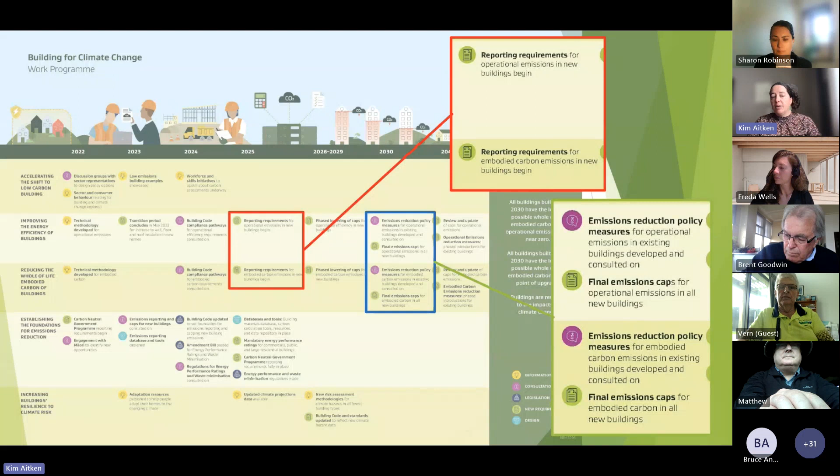This is the Building for Climate Change work program. It's available online. And I think what we're talking about today are the reporting requirements that begin in 2025 on both operational emissions in new buildings and the embodied carbon emissions for new buildings. This is quite a new one, certainly in a New Zealand context, the reporting of embodied carbon. And then we look at what are the final emission caps set for 2030. So although this is a 2030 work program, the measurement and understanding around what needs to happen actually begins at this point without any changes to this work plan in 2025.

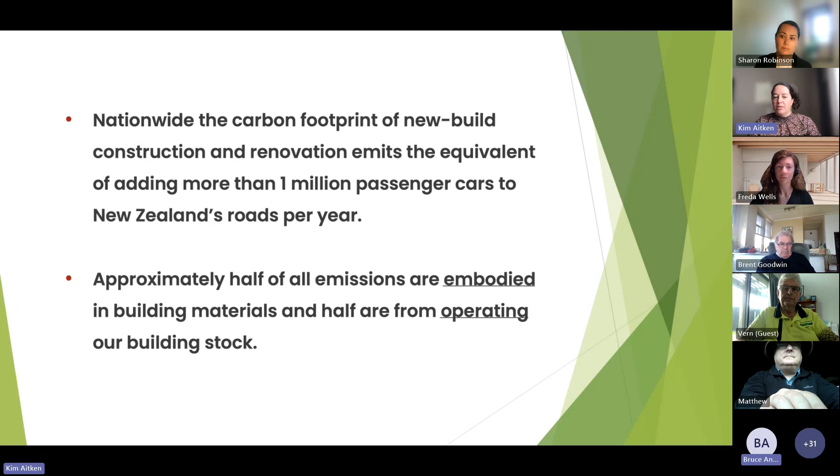So for a visual, this is really helpful. The carbon footprint of the new build, construction and renovation in New Zealand emits the equivalent of adding 1 million cars a year to New Zealand roads, split pretty much evenly between embodied carbon, which I'll touch on, and operating carbon of this new stock. So we've got a significant issue here in how we're building and what we're building.

And I will talk and introduce, without preaching to the converted, what the difference is between the embodied carbon emissions and operational carbon emissions. You'll see CO2e, carbon dioxide equivalent, which is how we measure greenhouse gases.

So when we look at embodied carbon as in context, we take what seems to be a simple unit, which is the humble fridge. And when we need to measure the embodied carbon of this unit, we have to look at every component part, what it was manufactured from, how it was manufactured, and the energy that went into manufacturing the individual components, the manufacture of the unit or the fridge itself, what components are scheduled to be replaced over the lifetime of that fridge.

So you include any items that have a lesser shelf life and will have to be replaced. And then we have to look at what happens at the end of life of that unit. It's seemingly quite complex, but what we're doing is we're being responsible for the choices we're making and the materials we're using.

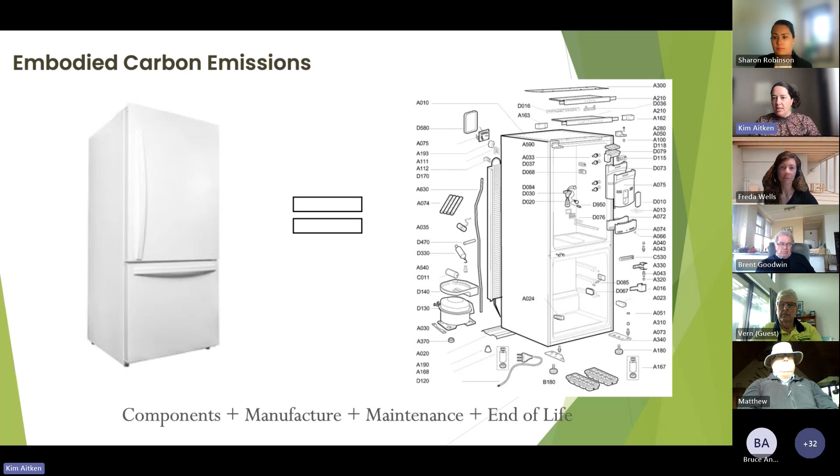In a construction standpoint, that translates to looking at the individual components chosen to be used in the manufacture of a house or construction of a house. Then the process itself, what is the process we're using to create that structure?

Same concepts, the maintenance over the lifetime of this house, replacing steel, replacing weatherboard, what items will need to be replaced and how many times they'll need to be replaced over the lifetime of that useful life of that building. And then the end of life, what elements of that construction will go to landfill, what will be recycled, what could be reused. And although we're early in looking at the technology around waste minimization, it's an important factor of what we're looking at.

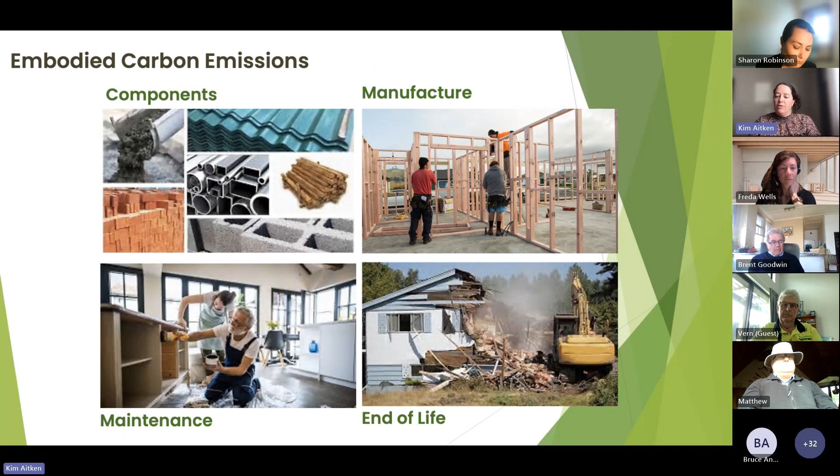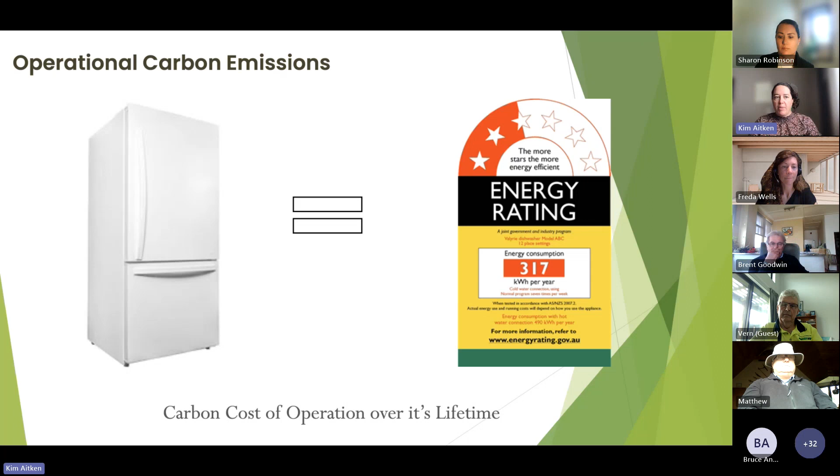More familiar, I think, to most people, operational carbon. If we look at that same fridge, what is the energy rating? How much energy is going to be consumed under normal operating conditions over the lifetime of that building? And that would be more measured in what we would know today around things like passive house. Minimal amount of energy is obviously better for the environment, but also for your pocket.

And when we look at that in a housing context, there's energy that's required for heating, separately the energy that's required for cooling, and then the energy of the systems within the home itself. So in this case, a hot water tank, things like your appliances, and then included in the Building for Climate Change program is water use, how much water is being used per liter per day per area of house itself.

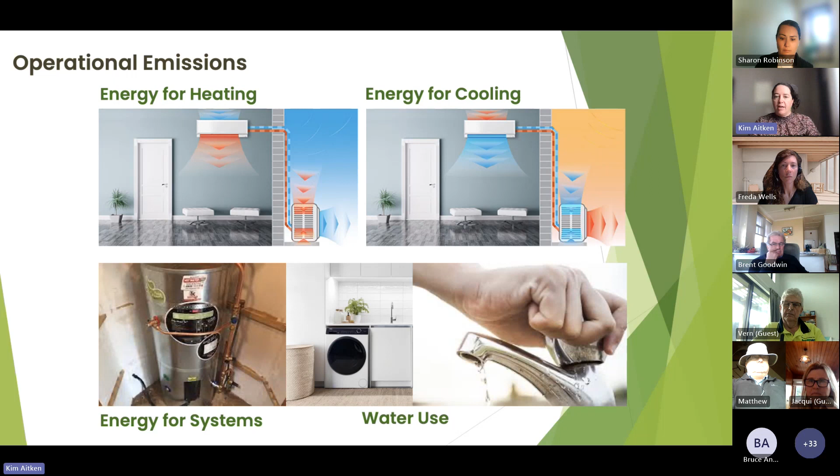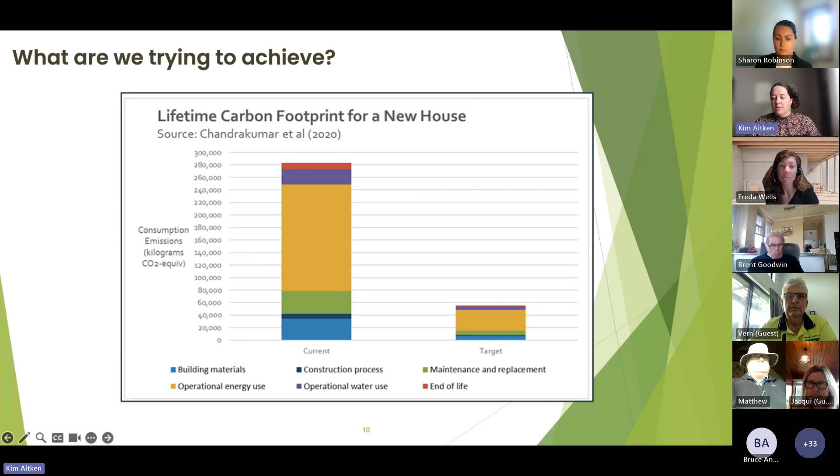This is my favorite graphic because it gives a really good visual representation of what we're trying to achieve. So this is the 2020 house, and this is a combination. This is the lifetime carbon footprint of a new home in 2020. You see in yellow here, this is the operational energy, how much energy is used in running the home, and then split out from end of life here in red, right down to the materials used at the initial phase. So this is what we have been doing, and our target is a significant and really profound reduction of that house and its footprint and what it's costing in terms of greenhouse gases.

So the future really looks like two considerations.

So you've got the choice of materials. Concrete and steel are the two biggest emitters in New Zealand, using about 50% overall of what's used. Then aluminium, plasterboard, masonry, and framing. Those are all elements that need to be thought about and their use case considered quite carefully.

And then looking at the performance of the finished building, things like insulation, which most people are familiar with, air tightness, which is how much does your building leak once you've heated or cooled your air, how much of that just leaks out through the building itself, joinery, and what systems and fixtures you're using that are low in energy but also considerate of things like water reduction.

So what is being planned at the moment is that the Building for Climate Change program requires compliance to be demonstrated. So you have to design to meet the target, but also measured or verified at the time of completion.

When I started my business in Canada in 2018, it was about 2 months before the first implementation of a series of the same step changes that are being proposed under the Building for Climate Change program. It's a massive transition from designing something to then verifying on site, which I know Sharon can touch on, that what you've designed has been constructed and actually achieves the targets that are necessary.

In that Building for Climate Change program, there are new measures proposed for building resilience, and this is more designing for climate in its extreme. Flooding, cyclones, everything we've experienced in the last 12 months, earthquakes—all of those are factors, wildcard factors that will need to be taken into consideration as the code goes forward.

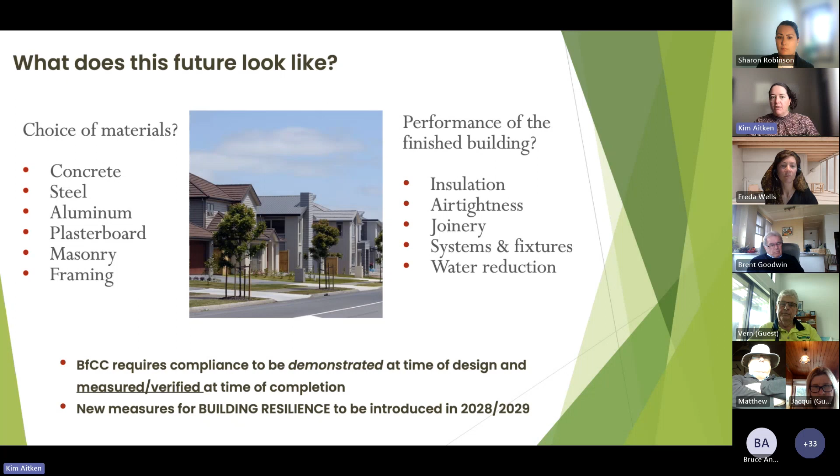Just helpfully, I like to picture things in numbers. At the moment when we look at what's being built in New Zealand and really understand the implications of the change, there's around 4 million square meters annually just in detached houses and low-rise residential construction that New Zealand produces. When we think of those 4 million square meters, every square meter has to be better. It has to be made of better materials, and it has to do better.

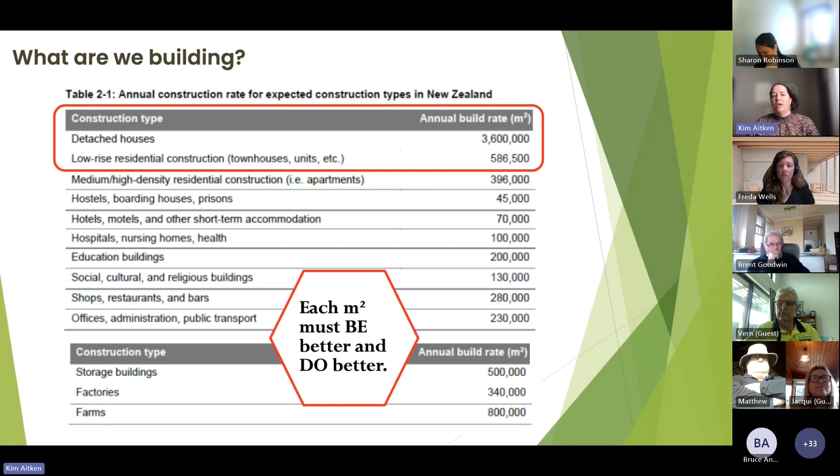So it's got to perform in a way that never really was required before here in New Zealand. Thankfully, lots of other countries have gone through this transition into high performance building. Some countries, such as Scotland and Ireland, similar size to New Zealand, picked the highest requirement and made it all happen in one go. Other countries, UK, North America, have picked step changes—every year something changes, and as you go, you gradually adapt to get to that higher target.

Thinking about that in an industry context—this is quite high level—there is generally a knowledge gap across the sector regarding the future code changes that will be required. It's not promoted, it's not talked about, there's not a lot of planning yet in place. We are a little bit early, but that's the point of what we're doing right now, is having these conversations.

Because from a project delivery perspective, continuously modifying your product or your process or your performance or your pathways to performance is highly disruptive. And I'm coming from an offsite manufacturing lens as well as an on-site construction approach. From the work that we've done within the Accord, there really are 2 distinct categories within industry at the moment, and our goal is to support those who are actively looking to be ready.

So, 2030 ready—what does that look like? We look at our fictional ABC building company: there's 2 pathways that have to be considered to be 2030 ready. There's the operational process compliance—is how I'm building going to get me there in terms of the performance of that end unit, regardless of what product is chosen to achieve that end target?

And then we look at the embodied carbon—is my system heavily reliant on steel, concrete, aluminium, items that we know are going to end up on the less-is-more list? But we're also aware that within this lower tier, product categories will naturally evolve between now and 2030. Things like your windows, the efficiency of your heating and cooling systems, the efficiencies of hot water tanks, laundry equipment, and low flow water systems—the market will step up as required to meet the demand.

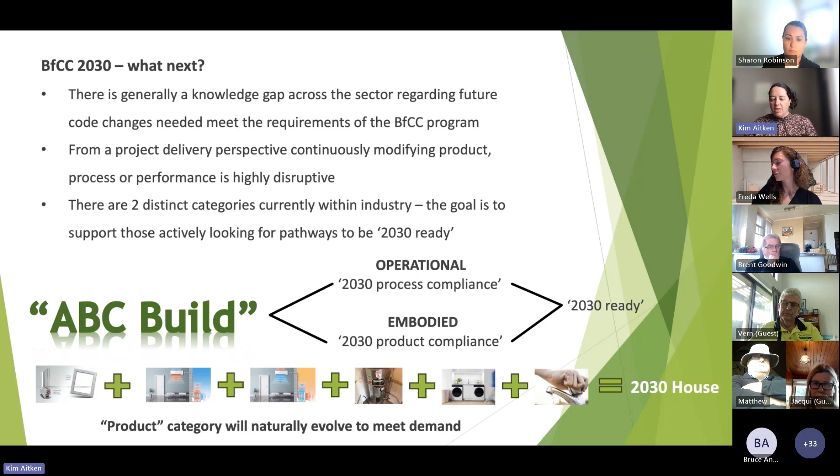So when we talk about being 2030 ready, we're not necessarily indicating that everybody has to step up today and create the 2030 house today. It's being aware of what's the responsibility of industry, what's the responsibility of government, and then what will the supply chain naturally adopt in order to really meet those requirements. So it's not as complex as it might appear on the outset.

So looking at the cost, the complexity, and the need for certainty, is there an opportunity? And this is a transition into the conversation around offsite manufacturing in New Zealand.

So this jump, from my perspective coming in from the outside, my specialty is the frame and truss sector and the utilization of that sector. And New Zealand already utilizes offsite manufacturing in 97% of homes constructed today. We just don't think about it that way. And that comes from the prefabricated roof truss, which has 97% residential market share, and then the use of pre-nail wall systems, which is 90% market share.

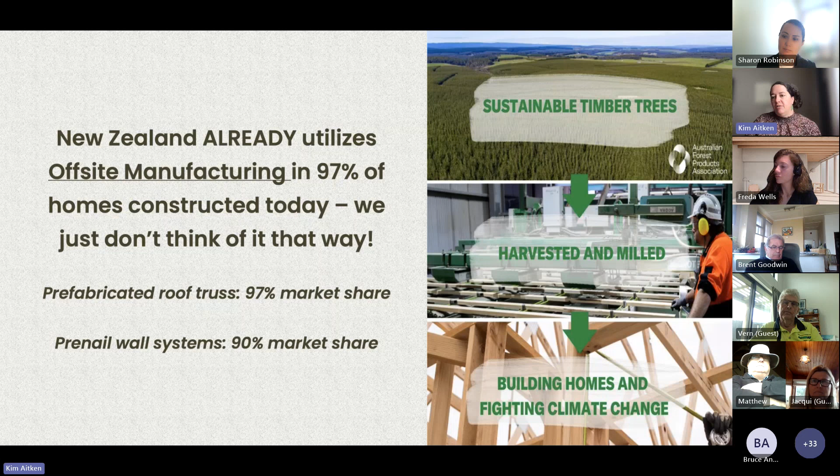So New Zealand is already, whether we are aware of it or not, way ahead of the curve in being familiar with the concept of producing a design, outsourcing that to a local plant that is doing it and has been doing it for a long time, and then utilizing those, in this case a pre-nail wall system on site, to really achieve what needs to be achieved in terms of putting a building together.

So the transition to high performance building will touch on the role of offsite manufacturing, OSM, and then there's the modern methods of construction, MMC. There's a lot of bandying back and forth between the two topics. There's prefabrication, there's a lot of umbrella terms.

And when we talk about modern methods of construction, we look at things that are not necessarily a manufacturing system or a product typology, but there are softwares, there are design tools, there's lifetime project management. There's a lot of ways to modernize within the construction sector.

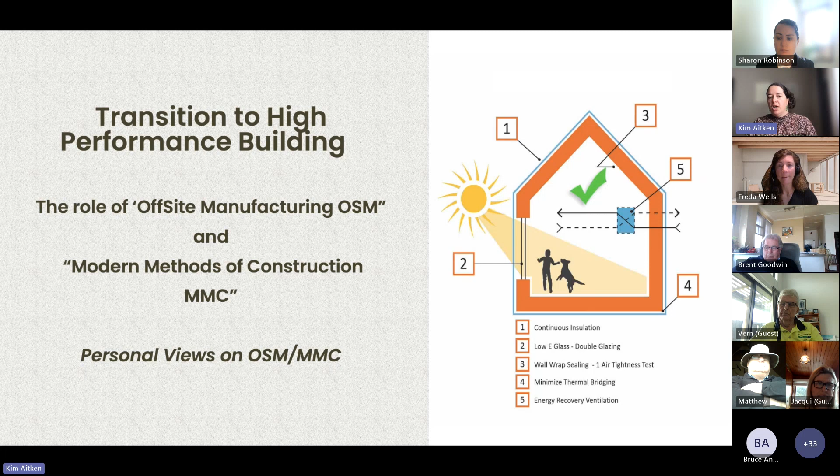And these are the views that I'll share, my own opinion on how New Zealand can use the OSM and the MMC to really smooth out what it looks like to build the new way.

If we were to really nut it down, high performance buildings is layers of complexity, and that's the days of a skilled craftsman on site creating structures with cut joints, and it was a craft that really transitioned to a qualified trade over the last 80 to 100 years. Trade schools, people going away serving their time, and now we're really at this transition to building science.

What is the science behind the design? How does individual components perform, and how do they perform when you combine them together? And the construction sector is probably one of the last to be brought into what might be looked at as the modern way of doing things. There's not a lot of industries that are left that are still doing it the old way. So I think the time is, we're not leading the charge by any stretch of the imagination.

A lot of words here, but there's the pros and cons of off-site construction and the pros and cons of on-site construction. I've just highlighted the ones that I think are important when we consider building for the future. I love flexibility, the flexibility that comes with on-site construction. There is a lot to be said for being able to adapt and modify and really go with the flow.

It is the current known way. So everything we look at going forward is this is the way it's always been done. What is the motivator or the lever for somebody to leave the old way and move into the new?

Cons of on-site construction: availability of skilled labor is one that at the moment we're on the brink, and give it another 5 to 7 years, especially with the knowledge transition that needs to come. That's going to become a major issue, and I've seen that in North America and back in the UK.

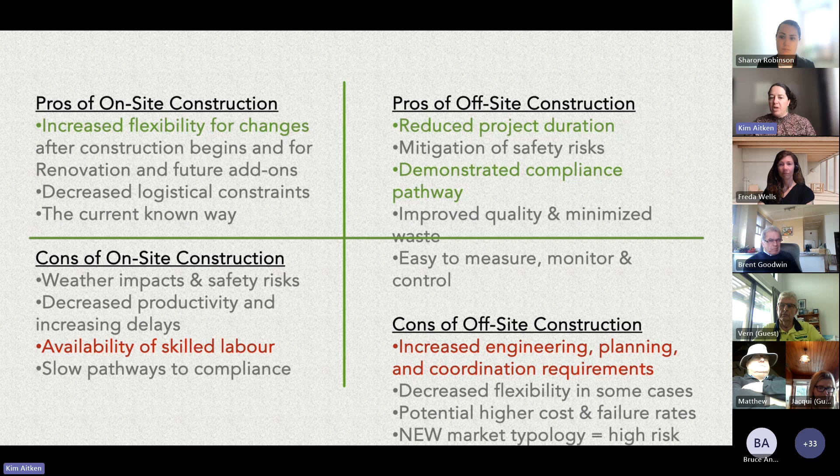So it's being cognizant that those upfront requirements really need to be thought about. So if I distill it all down to the opportunity I see with OSM or MMC, it's really putting the value in the right place.

It's not replacing tradespeople. It's not replacing local factories with monolithic, single source, big production boxes in factories where everybody gets a box and you take it or leave it. It's really understanding the value depending on what your project parameters are, whether it's cost, speed, complexity, simplicity, or just volume. It's understanding where the value can be found in that offsite spectrum.

As a structural engineer, the compliance piece is a major element for me, where I see the opportunity with OSM and MMC being critical, because as complexity increases, so do mistakes and problems and areas that don't become apparent right off the bat.

I know in Australia they've got issues like they've had in New Zealand with cladding. In North America, there was a lot of water issues, especially with offsite product, where you can't go in and modify it. You don't know what's behind the walls theoretically, but easier compliance and having a process that's been approved, and that process is repeated over and over in the factory, helps.

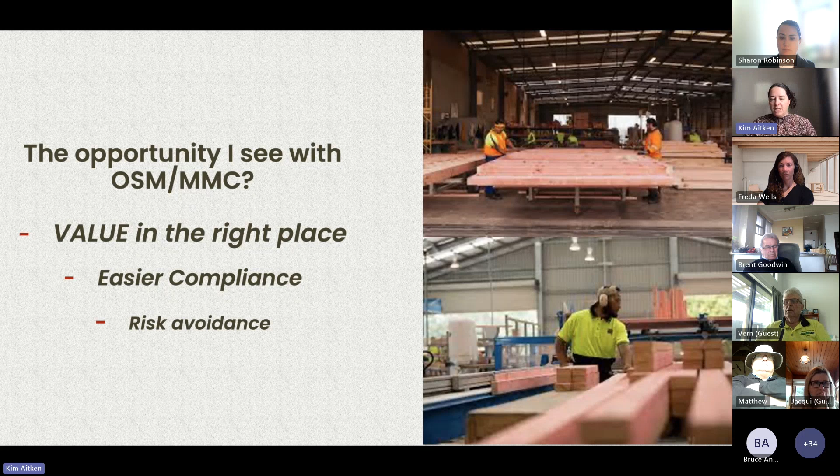And risk avoidance is probably the third one, where we don't want to turn around in 5, 7, 10 years' time and realize we made fundamental mistakes transitioning from the old way to the new way. I've seen that with specific types of insulation on the outside of a frame not installed correctly. In North America, we didn't have a couple of decades to understand the water was getting in - it was within 3 to 5 years because of the ice factor. So avoiding risk because a process has been tested and proven is highly important.

And that, I will now hand over to Sharon to give her views.

Thank you, Kim. So Einstein said the height of insanity is doing the same thing over and over again, and I think Kim's touched on this. We're in a changing environment. We need to change what we're doing.

As Freda explained, my background is architecture. I was doing architecture, drawing house plans at 7. So this is my passion. This is where I want to make a difference.

So I'm just going to touch on, there's lots of changes, expanding a little sideways on what Kim was talking about. We are seeing changes in the medium density residential standards, which are coming into effect in some places. We've got changes with energy efficiency, water efficiency, waste minimization, and of course operational and embodied carbon. I'll touch on those throughout the presentation.

I've got a slide that touches on the tools and resources available at the moment. I'll give you a crash course in passive house principles, touch on a couple of myths with our New Zealand building code that people tend to get stuck on, and then why we should be embracing this change, plus some opportunities and challenges with the medium density, the offsite, and the energy efficiency and waste minimization space. So that's me, as Freda said, in all those spaces.

Jane Goodall's my hero, and we are the most intelligent creature to walk the earth, and we are destroying our home. So Kim touched on this with Building for Climate Change.

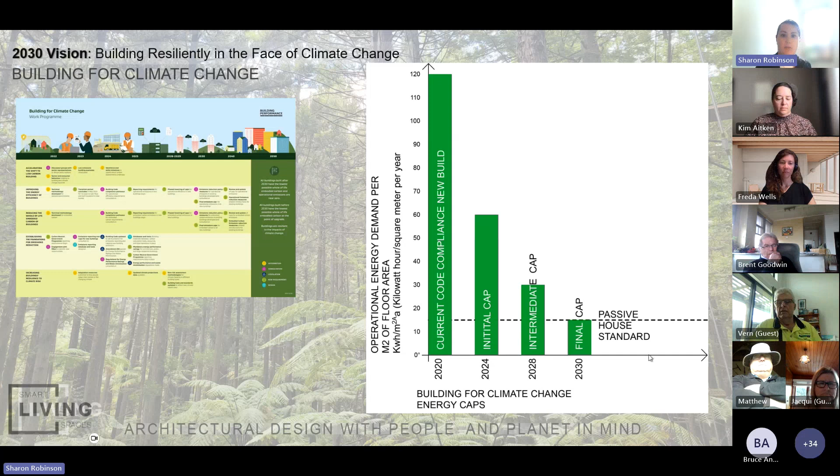I can speak to this as a passive house designer. Basically, by 2030, we're looking at that passive house standard. Passive house has been around since 1992. Ironically, we only introduced insulation as mandatory in New Zealand in 1978 - 14 years later, in Europe, they were developing houses that we're aiming for in 2030. So it's an international standard, an international organisation with over 30 years experience. It's possible, and there's a track record we can key into, with learnings there.

Kim did touch on this with timeframes and process. It's this part, the design and engineering part, where there are amazing opportunities between passive house, energy efficiency, or Homestar, because that's the side where we need intense focus on design. So if there's collaboration with everyone around the table, we can really get everything nutted down and actually deliver a faster project that's a high performing project.

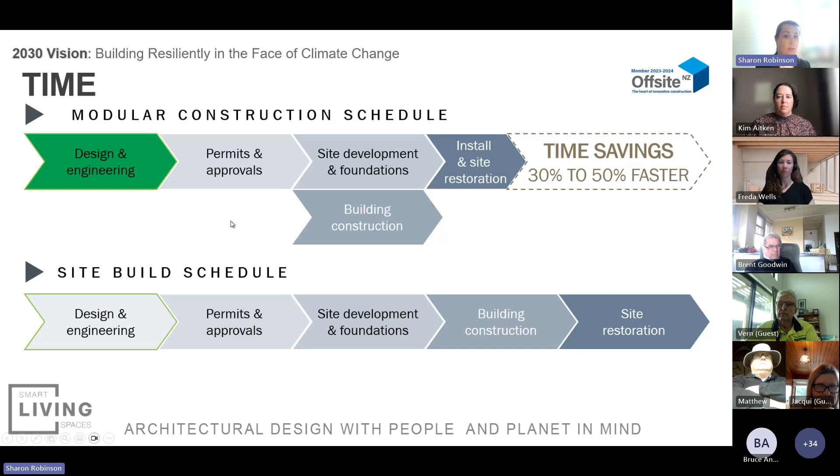We have Passive House Institute, and New Zealand has its own Passive House Institute. BRANZ is doing a lot of work in this space. They have design modelling with ALF. We've got MBIE in that space too, obviously with legislation.

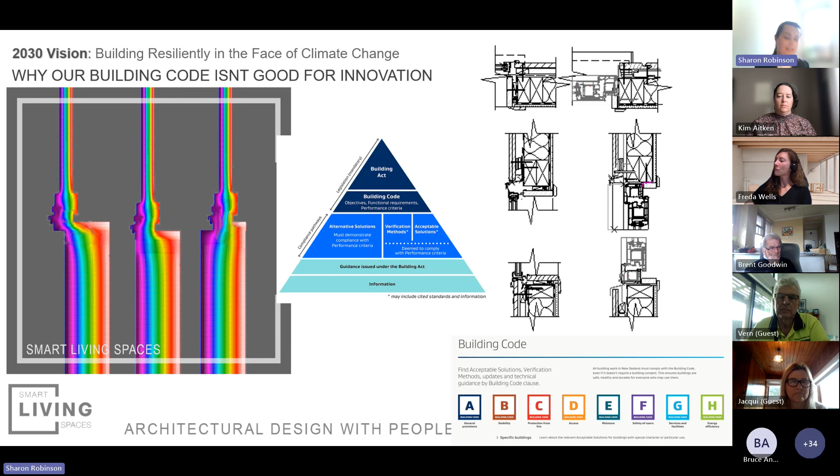I do want to say that H1 is energy efficiency, not insulation. So we've got a bit stuck on that in recent conversations.

The second myth to bust is the performance of natural ventilation — this concept of opening up your windows and just magically having air changes. We need 0.35 air changes per hour to remove all of that stale air out of our homes. Simply opening up our doors and windows isn't allowing that to happen, because that relies on the wind blowing from a certain direction at a certain speed, creating the necessary pressures.

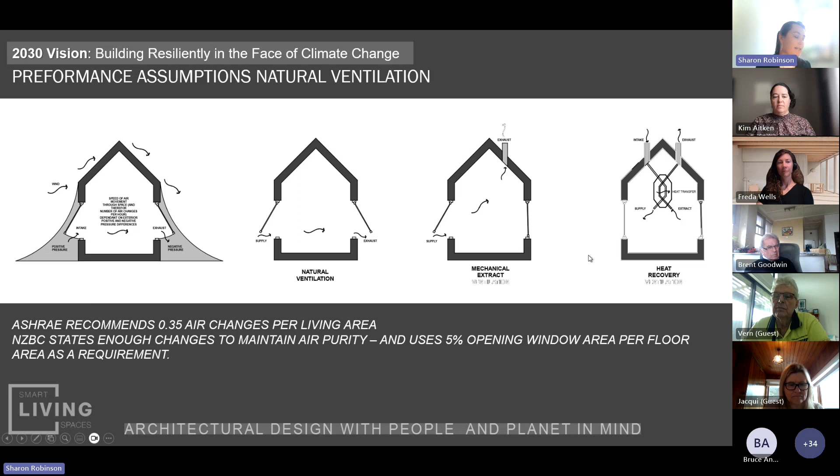So we need to start moving past mechanical ventilation and start looking at heat recovery ventilation if we're to embrace energy efficiency. I'm touching on passive house because I know it, but it is a building that's designed to optimize the health and well-being of those inside it while consuming very little energy.

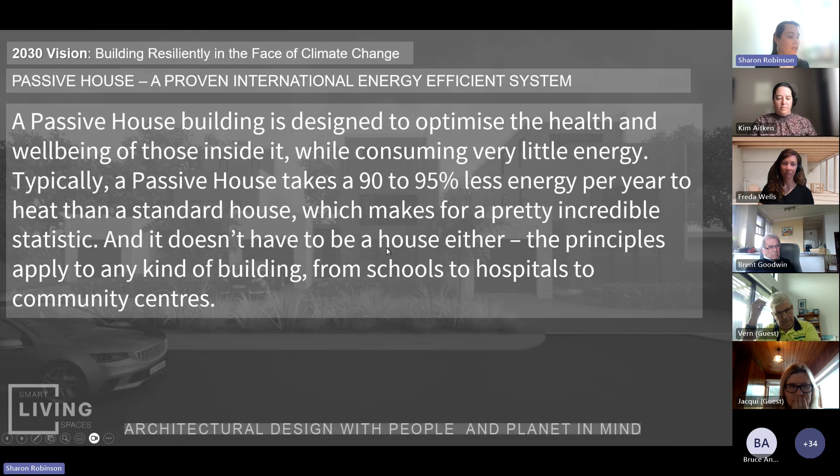Typically a passive house takes 90 to 95% less energy per year to heat than a standard house. I'd also say to cool as well — we underestimate what we need to cool. We tend to think about New Zealand houses just needing to be heated. And it's not just for houses — haus in German means building.

Better quality windows. We use aluminium in our windows — it's really good for cooking your food on a stove, and somehow when we put it into the windows, we think it's going to operate differently. Metal is a very good conductor of heat, so we should be looking at UPVC and timber as alternatives.

Air tightness — we generally don't consider air tightness in our buildings, yet it's still a factor. Air tightness means you stop moisture from tracking through your thermal envelope, so we're stopping interstitial condensation. We've had lots of people say, I've put double glazing in my house, I no longer have weepy windows. But if you haven't got an airtight house, that moisture is going somewhere and it's condensing somewhere in your thermal envelope. So we are going to see a new leaky building crisis, and that's going to be from the inside out.

So we need to address air tightness, and our new construction is getting more and more airtight — this won't be an issue in our old stock, this is not an old stock issue. Obviously, efficient thermal insulation, continuous thermal insulation, and then lastly, heat recovery ventilation.

It just makes sense to recycle the heat that you've already invested in. So basically, Passive House is a thermal modelling system that allows us to evaluate our energy use, taking into account the losses through the thermal envelope and ventilation.

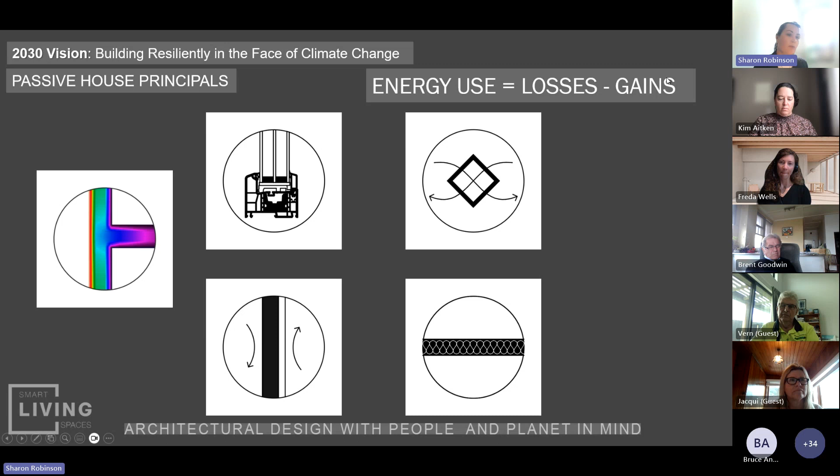Obviously, when you ventilate a space, you can lose heat or you can gain heat. Then there are the gains you get through proper orientation of your windows, and internal gains from cooking and appliances. Touching on overheating, because I think this is going to become a bigger issue.

Down here is the Auckland average temperatures, and here I've marked out the solstices and the equinoxes. There's been a myth that you design for the summer and winter solstice, but that's just 2 days of the year. If you notice here, the solar angles in Auckland for the equinox in both spring and autumn have the same sun's angle, yet the temperature in the autumn equinox is actually higher than in spring. So we need to shade more in autumn and allow more sun in spring.

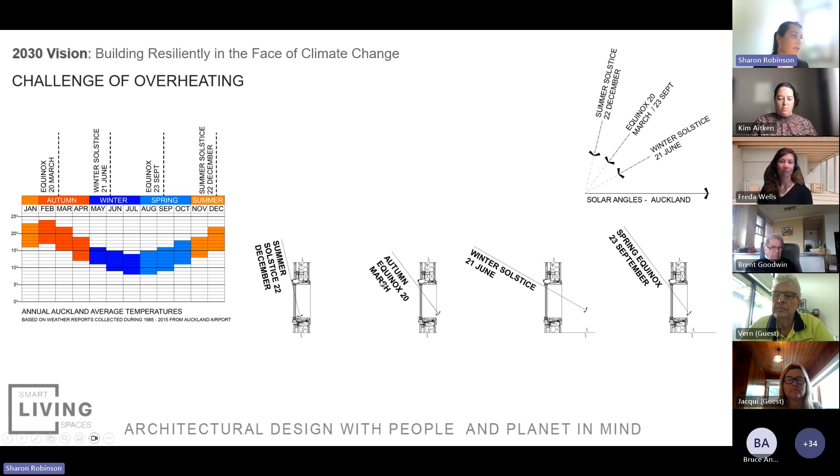So we need to start to consider shading in our buildings, and external shading, so that we can stop the heat from even meeting our internal environment.

So why should we do this? As Kim mentioned, hot water and space heating are our two biggest uses of energy in our buildings. Here's a scenario: a 200 square metre house that we are heating and cooling to 20 degrees year round, assuming a power price of 32 cents per kilowatt, which is obviously going to go up in the next 5 years. For a code-compliant house at the moment, it's looking at 120 kilowatt hours per square metre to heat and cool it to that 20 degrees. That means when you do the calculations, the power bill is $7,680 a year.

We don't pay that, because we compromise the health and comfort of our home to be able to afford to live in it. But if you were to take a code-compliant house today and get it to passive house performance standards with the amount of energy pumped into it, so we're comparing apples with apples, your power bill would be $640 a month versus $80 a month.

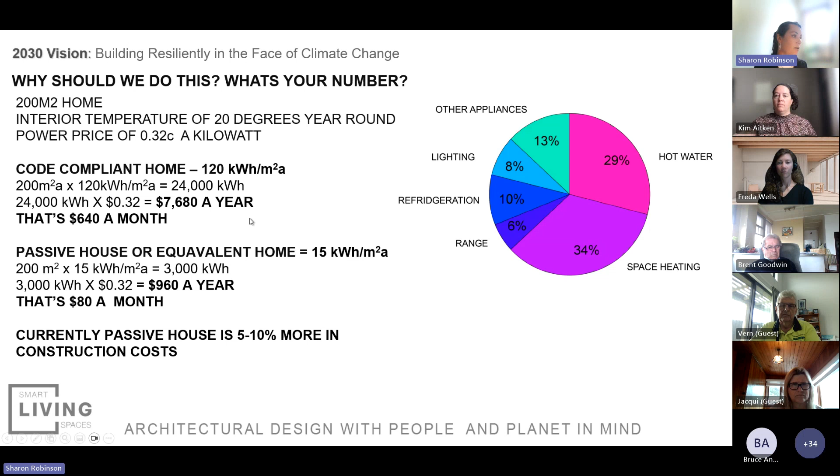Currently a passive house is 5 to 10% more in construction costs, but that's right now. If we consider this over a period of 10 years with rising energy costs, what's the true cost of it? We need to stop looking at construction costs in square metre rates, stop looking at construction costs as initial costs, and start looking at the lifespan of the 50 years that the building code asks us to do as a minimum.

Another reason why we should do this: I heard last week that 30,000 New Zealand children are admitted into hospital with asthma-related symptoms, not diagnosed, admitted to hospital. This lady, Catherine Letner, is part of Asthma New Zealand, she is the chief executive. She has got into the construction space because she has seen the result of us building the worst performing buildings that we can legally build. So we have one of the highest asthma rates in the world, which isn't really a statistic we want to be proud of.

And this is based on moisture and mold, not just insulation.

The opportunities with the medium density space and offsite construction - there is some resistance to it, but I'm a glass half full kind of girl. The attached housing typology that medium density is going to offer us allows us to have a new social typology, which people will resist, but there are energy efficiencies with joining spaces together.

This isn't a great example of it, but if you join two conditioned spaces together that are both heated and cooled to 20 degrees Celsius, you reduce the amount of energy lost on that shared wall. The challenge with medium density, again, is the sense of privacy, so we need to make sure we get that right at the design stage. But there's a real opportunity for social connection - we do live quite disconnected lives, and I think lockdown and COVID showed us how vulnerable we are with that.

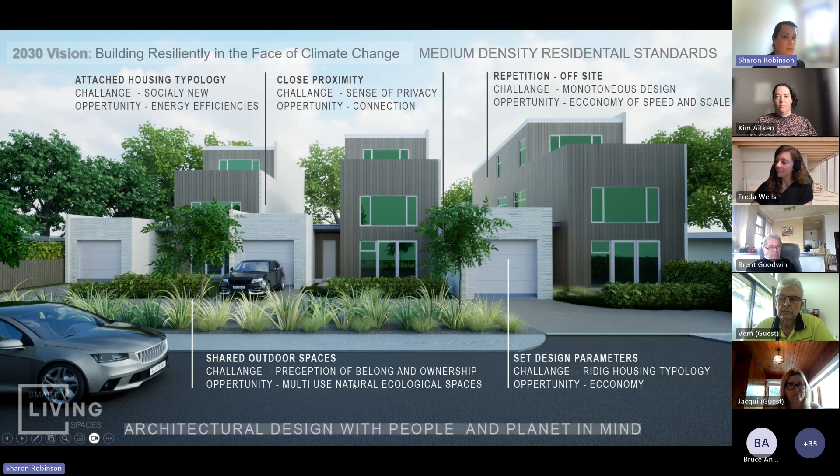The time on site, touching on that design stage, and Kim touched on this too, about getting it right. If it's not considered in the design space, it's quickly going to become a problem on site, and that's going to be very difficult to rectify.

But a lovely opportunity with offsite is that we've got less travel time for your tradies, less weather delays on site. With intertenancy walls joining buildings together, we have the challenge of creating spaces with good natural lighting.

But we also have the opportunity of good thermal efficiencies. With offsite assembly, the challenge is the lack of understanding at the moment. We all need to empower ourselves with knowing not just what we do, but how we fit into the whole process.

But the opportunity is better collaboration and innovation with parties, all sitting around that table at the design stage. Offsite offers this amazing opportunity of reduced working at height. We lose a lot of people on building sites - they're quite dangerous spaces. So the challenge here will be the planning and coordination so that you can reduce that working at height, but the opportunity is safer working environments.

And lastly, with waste, there's the challenge of accounting systems. I hear of tradies constantly leaving their waste and not caring because they're on site - no one else is there to see them do it, and it's not my problem, I'm not paid to do it. So with the offsite space, there's that opportunity for more efficient use of offcuts and better accountability of leaving a cleaner site for the next person to move into.

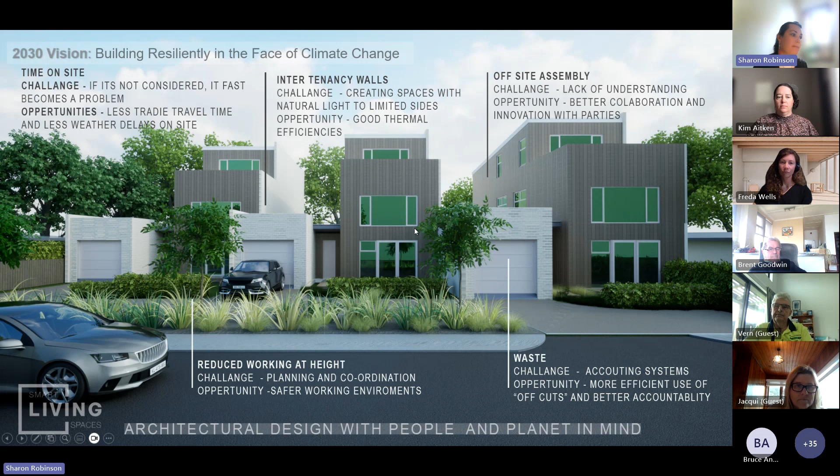Just lastly, and it's been a bit of a crash course, so I do apologise, but this is another saying that I keep close to my heart: plant a tree under whose shade you will never sit. We've been asked to stop competing against each other and realise we're on the same team to create a better environment. The construction industry has so much argy-bargy through it.

The bloody architect, the damn builder, and we need to all get around the table and realise we're all on the same team. Our client's not the developer, it's not the council, it's not the builder, it's the future occupants of the spaces we are creating, and undoubtedly the people we will never meet. Just as Catherine Lettner will tell you, it's the children who get diagnosed and get hospitalised every year with asthma. So that's my crash course.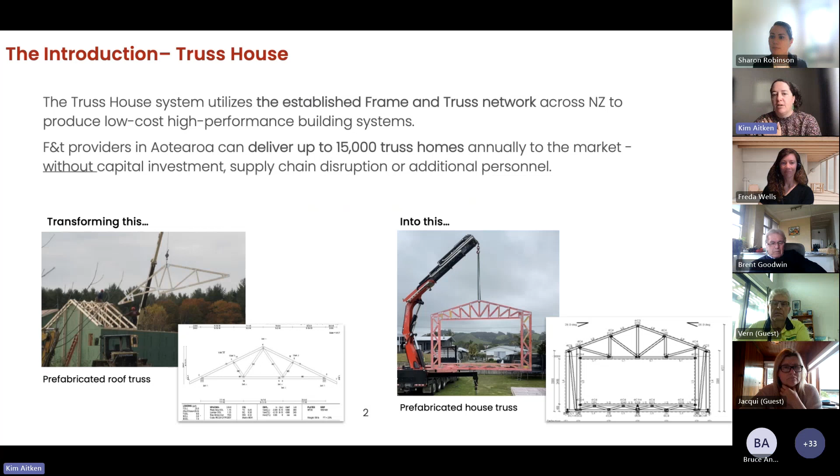We've built 18 different typologies of housing. At Truss House, basically, we use the established frame and truss network across New Zealand to produce low-cost, high-performance building systems, turning the traditional 97% market share truss roof system into an entire frame system to allow up to 15,000 truss houses a year to become integrated into the New Zealand market without investment in infrastructure, factories, any supply chain disruption, or the requirement for any additional personnel.

And this is my personal project passion, which is high performance housing for everybody at the very minimum - really good boxes. Truss House is just a method of framing. We have an architect sketch - this is just an example. Choose a frame typology: there's unlimited shape, size, orientation, pitch, slope, and use case.

These Truss House frames get assembled on site, as this one here was, all frames or a combination of frames and pre-nail walls. And then what you inherently have is this high performance building envelope with wider walls, reduced thermal bridging, highly engineered and rigid in all the right places when we think about future resiliency.

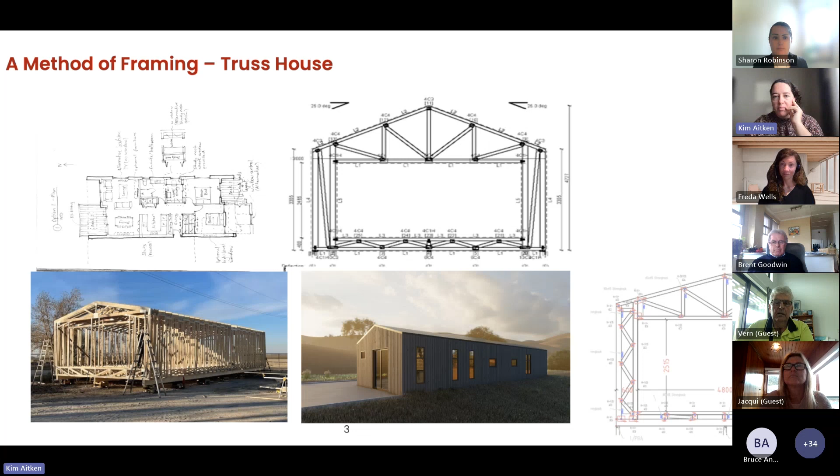The one we've built in New Zealand went through a tornado earlier this year and came out pretty much unscathed. We do not build, we are not the builder. We have a system that is available for all the builders, you know, all the government organizations. The client is whom the client chooses to be.

We've got 4 different typologies that we offer here in New Zealand: single-story houses with a suspended floor, single-story houses on a concrete slab, and then we've got 2-story and 3-story systems. We have just developed the 3-story system in the last couple of months.

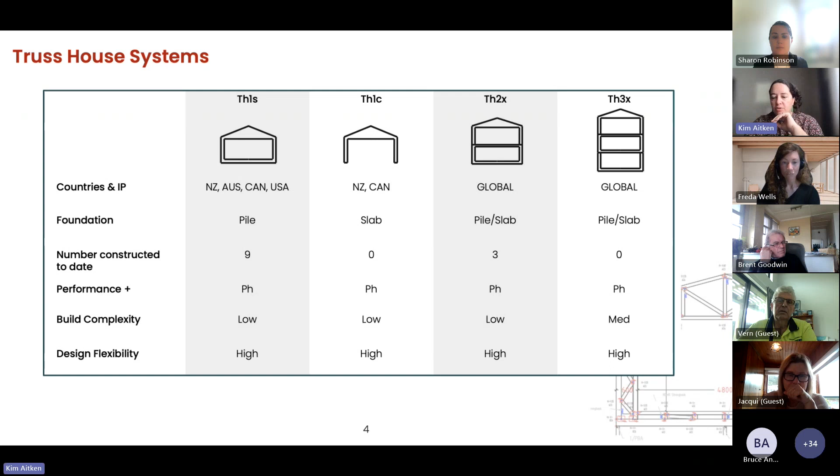We do this in a very simple way. We charge a license fee for every system that is sold, approximately 10% of the overall cost at frame and truss end of the housing system it represents. And we are covered under 3 sets of patent intellectual property for the system typologies that we've mentioned.

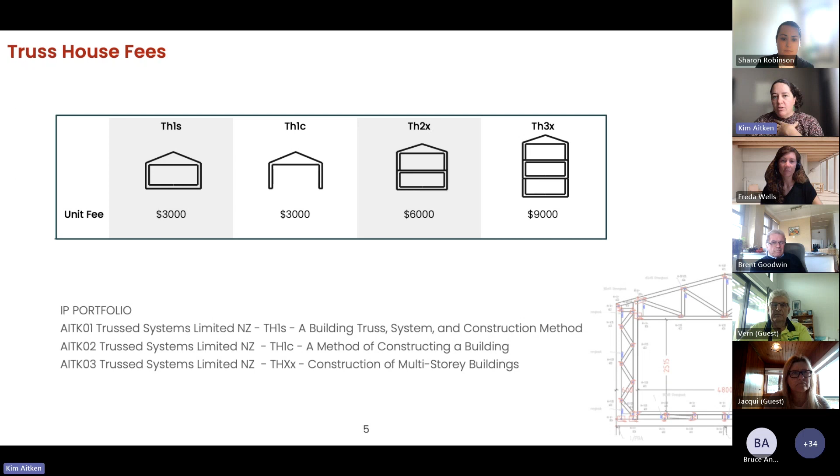So that model that we've adopted, we were the builder in Canada, and we realized the limitation as an organization of being the builder comes back to where does the value sit? Our value sits in what the system typology is, how it gets used, and what it means for a company or an organization to have access to this locally available system. And also, from our perspective, it allows 99% of the project revenue to stay within the community.

Alexander Construction is our project partner for the Hawke's Bay region, and what we're developing is targeted really at the shortage in that region of houses prior to the cyclone. And now going forward, there is an ever increasing need to build better than what was there originally.

Alexander as an organization have been around since 1947, and they have a very strong mandate around producing quality buildings. That's the first thing on their list. They are hyper focused on cost management and defending a client's budget. They have a high business ethic with all parties in the industry, which is beautifully written. They're energetic and motivated in the marketplace, and they're committed to sustainable green building procedures.

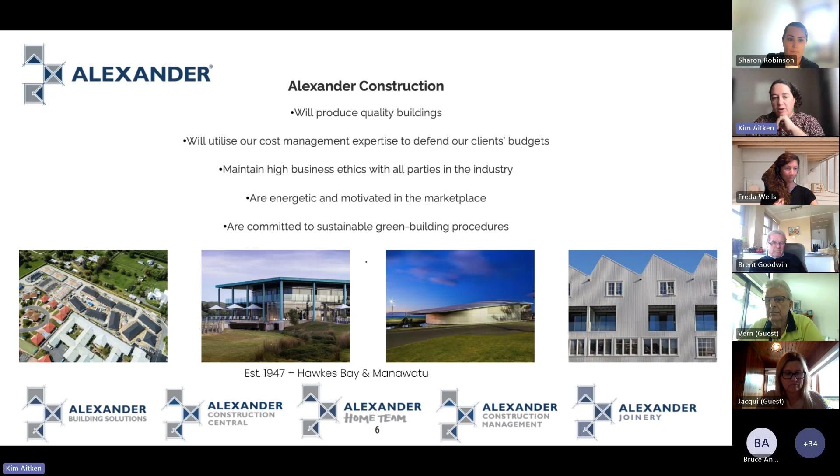They're across Hawke's Bay and Manawatu. They would be an example of an organization who have stepped up to be 2030 ready. A couple of their projects: Retirement Village, Castle Hill Winery, the aquarium in Napier. From Alexander's perspective, moving forward towards 2030, they were looking for a typology that would allow collaboration with their existing network, but also being future ready to adapt to what was coming.

So this collaborative approach: Alexander are the lead, partnered with ourselves, Truss House, their local architects Studio 26, Tumu Frame and Truss, and EB Consulting Engineers. This project is a 3-bedroom home compliant with the Kāinga Ora M255 design regulations for use of space for government housing. They deliver for Kāinga Ora as well as market.

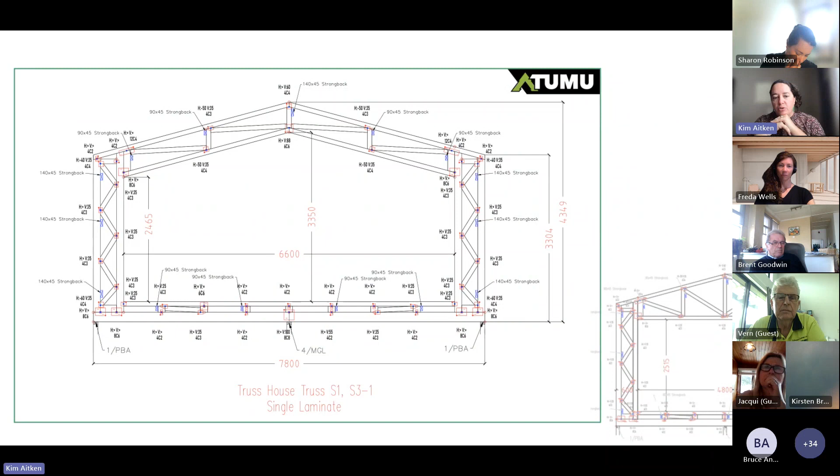This particular structure is designed using the Truss House system. Tumu ITM created a frame system for Alexander to be able to use to build this housing typology in a number of days. Start to finish, construction time would be 3 months off-site to deliver on-site. And very simply, Tumu has also come up with a layout on how these trusses get assembled on site.

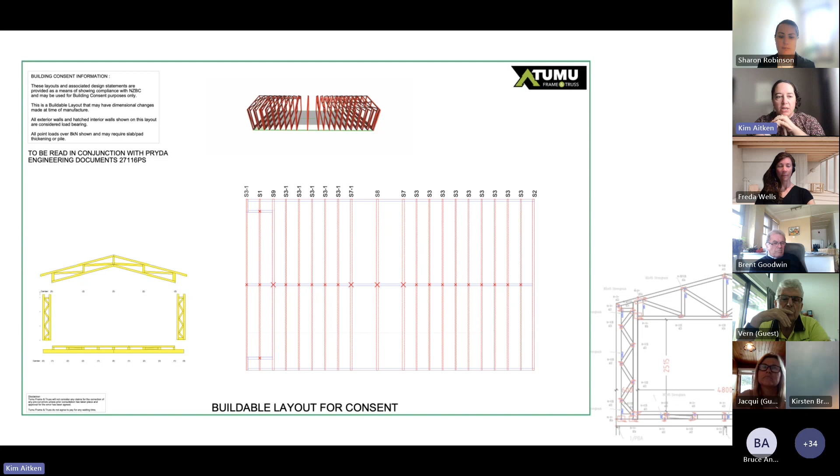Very simple, and critically for the supply chain that Alexander operates in, all covered under existing New Zealand certifications around PS1 compliance. This is a process that speeds up the code of compliance and does not add additional layers. Studio 26 had free reign to design the use of space.

They've got vaulted truss, open living space, tall windows, calculated natural light. And the beauty for the architect, who has a long-term relationship with Alexander Construction, is using the truss house frame allowed them to design to their clients' needs without modifying or adapting the process in too many different ways.

So the end result is that Alexander Construction, through the collaboration, can construct hundreds to thousands of homes, either an on or off-site solution. The off-site solution is possible because the frame systems come already pre-assembled, and the assembly off-site is a really quick process, so there's not a large infrastructure. They've got land that they're going to use to do the off-site manufacturing, or the system typology can be built on site.

What Alexander were looking for when we initiated this relationship was how to maintain their existing supply chain. They wanted to work locally, use a local supply chain, and keep their existing design team where possible. That design team are the same as they were, but they are now using this process, DFMA, which is design for manufacturing and assembly.

Right at the outset, they're designing everything to be manufactured. Probably the most interesting bit is Alexander Construction can now produce a series of Homestar 7 or 8 builds across 1, 2, or 3 stories. Currently, the pricing sits at or below the equivalent market for a traditional code compliant home.

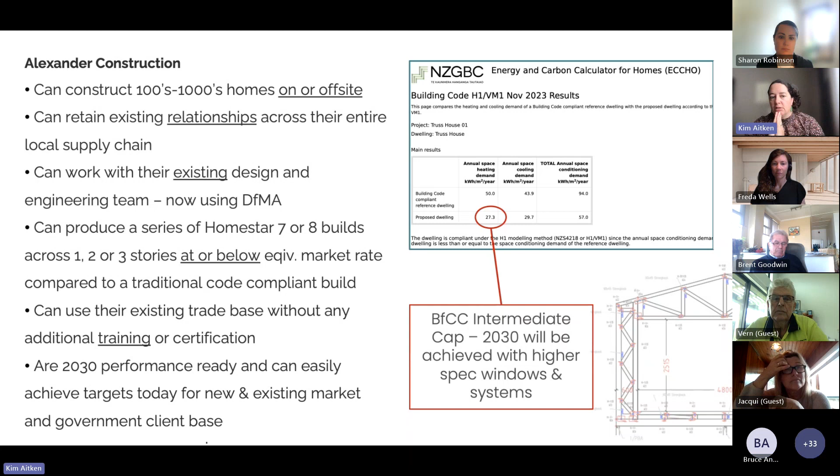But Mark at Alexander Construction knows that he can achieve the 2030 compliance with these higher spec windows and systems when they come. So it's a recognition of being 2030 ready within his entire organization across residential and small scale commercial. And that is, yeah, final slide, what it looks like to work with Truss House in this case.

Mark's produced or put together his team, build, design, his local frame and truss, and his structural engineer. First project, which is this pilot process, we consult, we provide the license, we provide all the CAD files, material specifications, we work with the designers, the engineers, and the team, and then that knowledge is transferred.

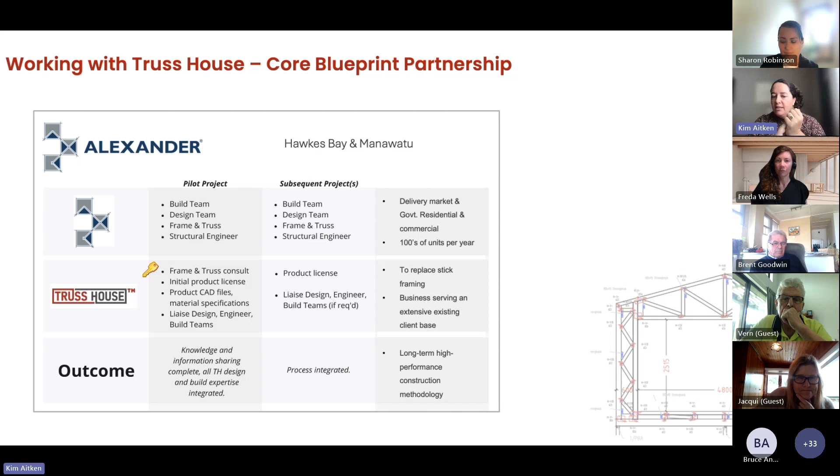Second, subsequent projects, we provide a license and we liaise if necessary, and the end result is a delivery of market and government residential commercial units up to hundreds a year. He's replacing stick framing, and the business is serving an extensive existing client base. And the long-term high-performance construction methodology has been established.

And that is it. Thank you very much, everybody.